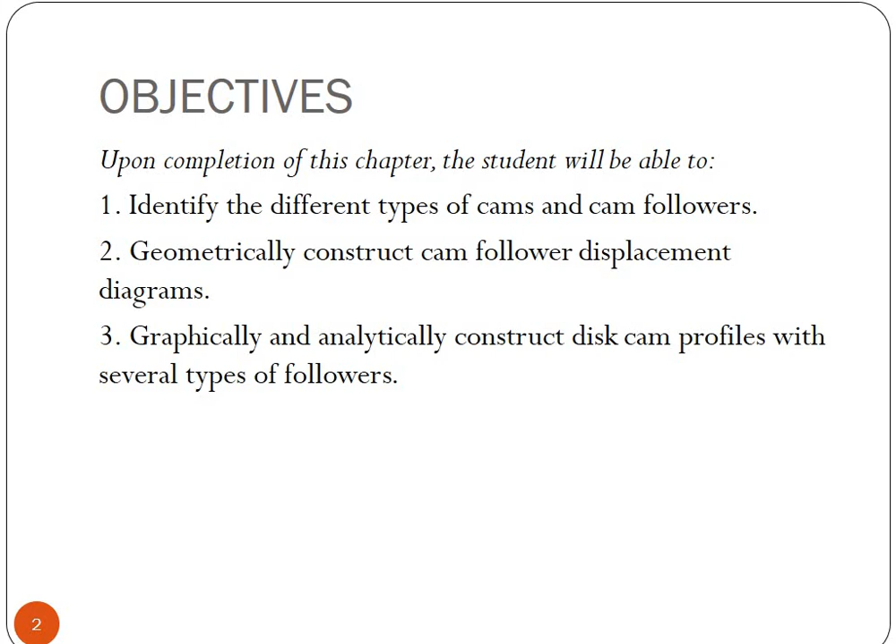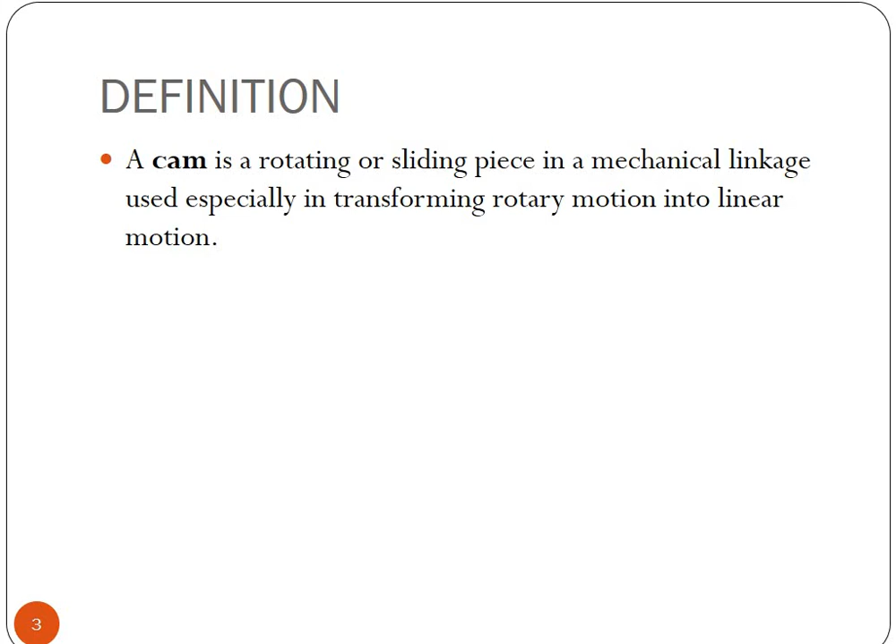So we will draw or construct the cam profiles. A cam is a rotating or sliding piece in a mechanical linkage used especially in transforming rotary motion into linear motion.

Types of cams: plate or disc cams are the simplest and most common type. This type of cam is formed on a disc or plate, meaning it is thin, as we can see in the figure.

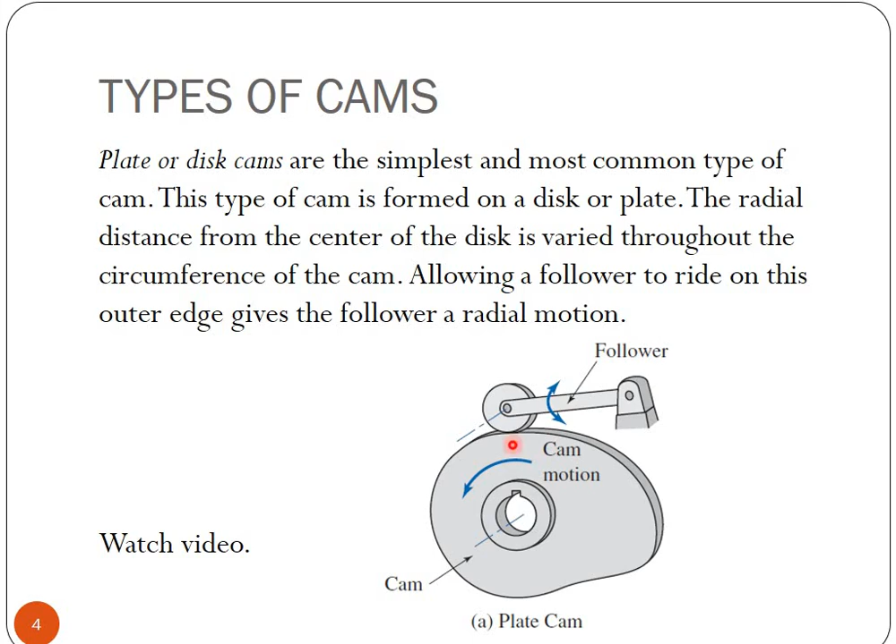The radial distance from the center of the disc is varied throughout the circumference of the cam. If we notice, the radial distance from the center to the surface varies, so the radius differs at different points. Allowing a follower to ride on this outer edge gives the follower radial motion.

Cylindrical or drum cam: this type of cam is formed on a cylinder. A groove is cut into the cylinder with varying location along the axis of rotation. This is the axis of rotation.

Attaching a follower that rides into the groove gives the follower motion along the axis of rotation, so the motion of the follower is left and right. Or if we flip it upright, it becomes up and down.

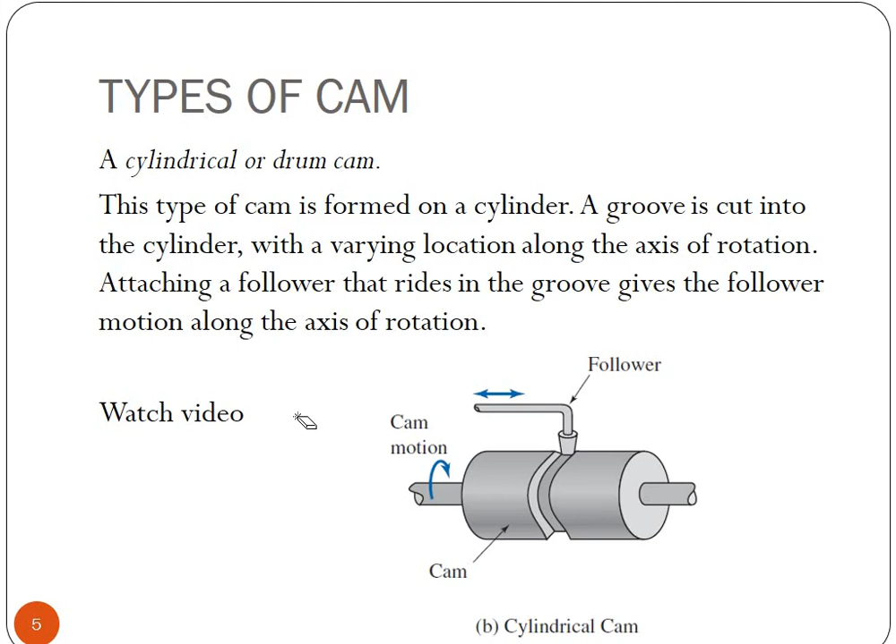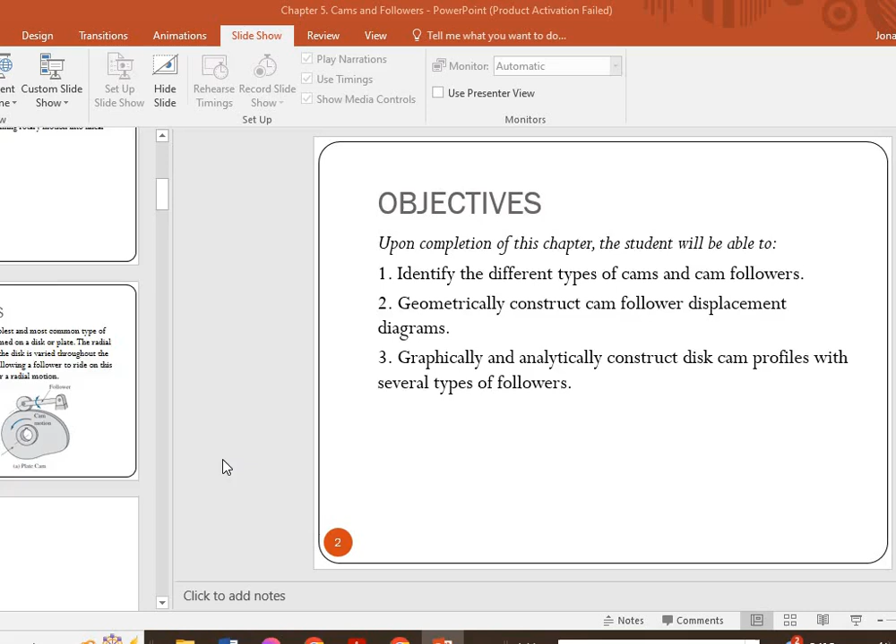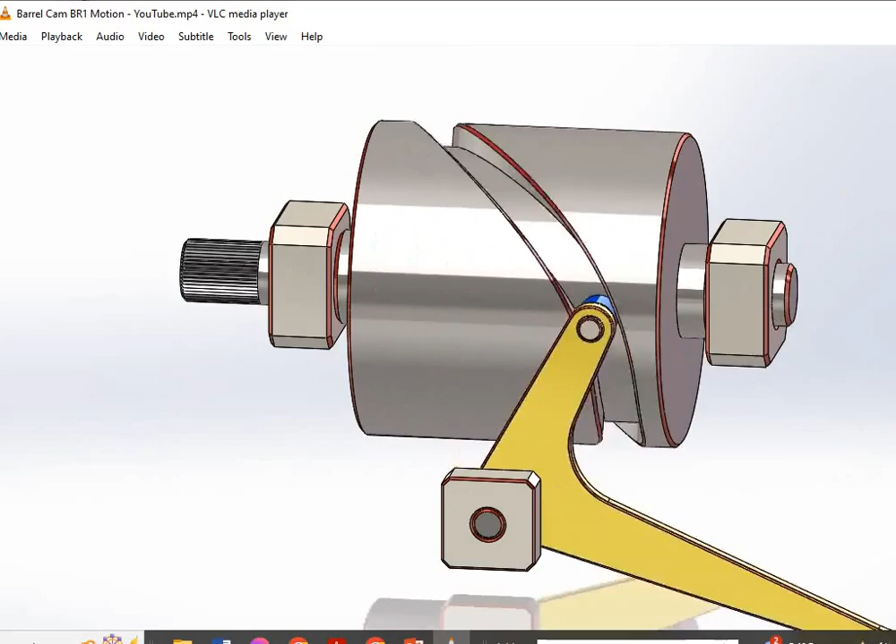Let us watch the video. This is the barrel cam type, which is used in a sewing machine.

Next we have the cam with translating motion. When we say translating, it means the follower moves only in a straight line.

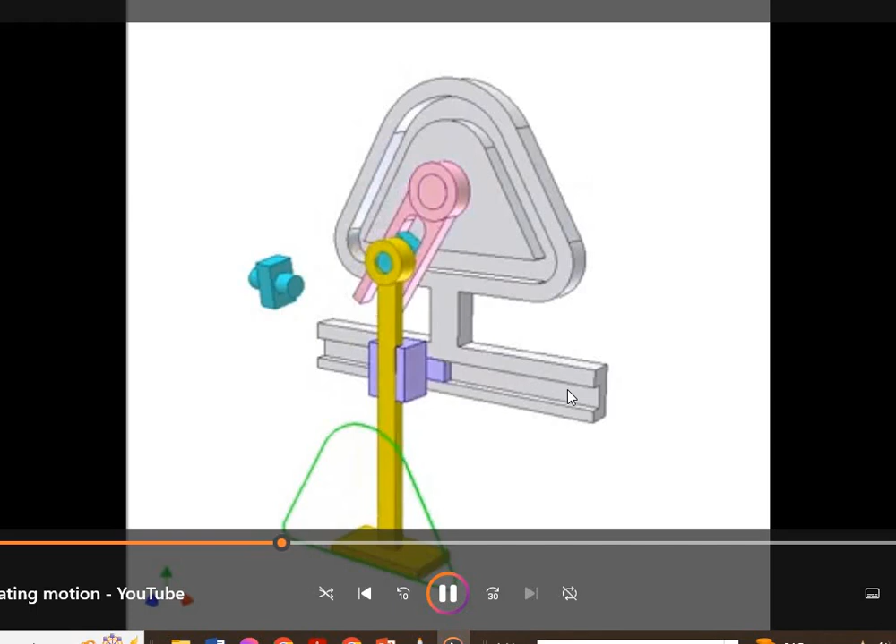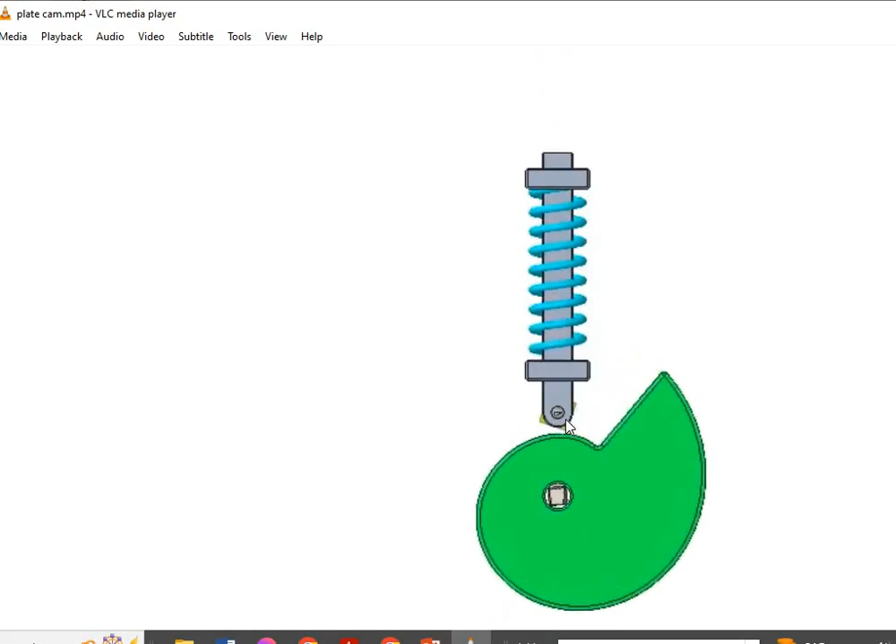Then the plate cam works like this. This is our follower, a roller follower, which has a wheel-like part, and then we have a spring.

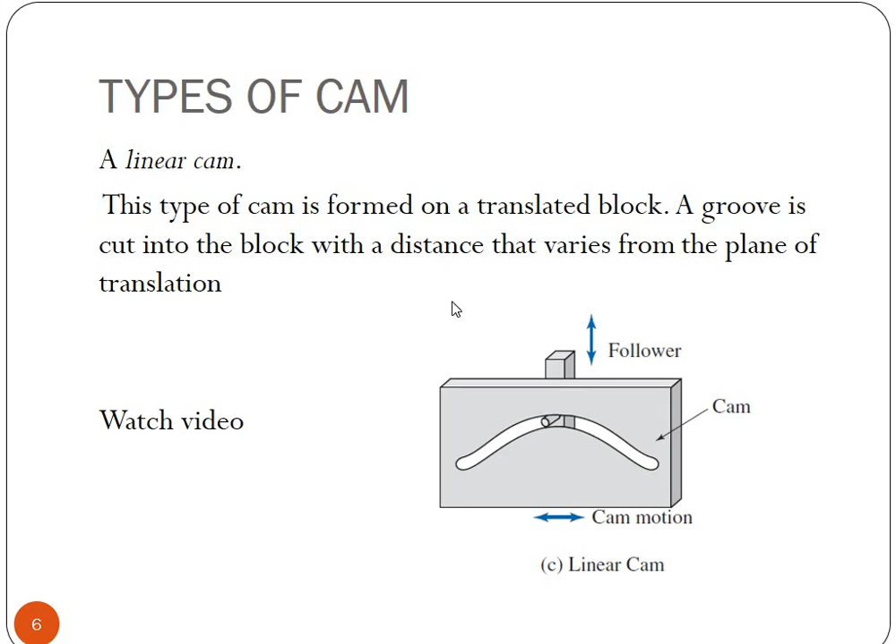Types of follower according to motion: translating, meaning it moves in a straight line. Its motion is only along this axis.

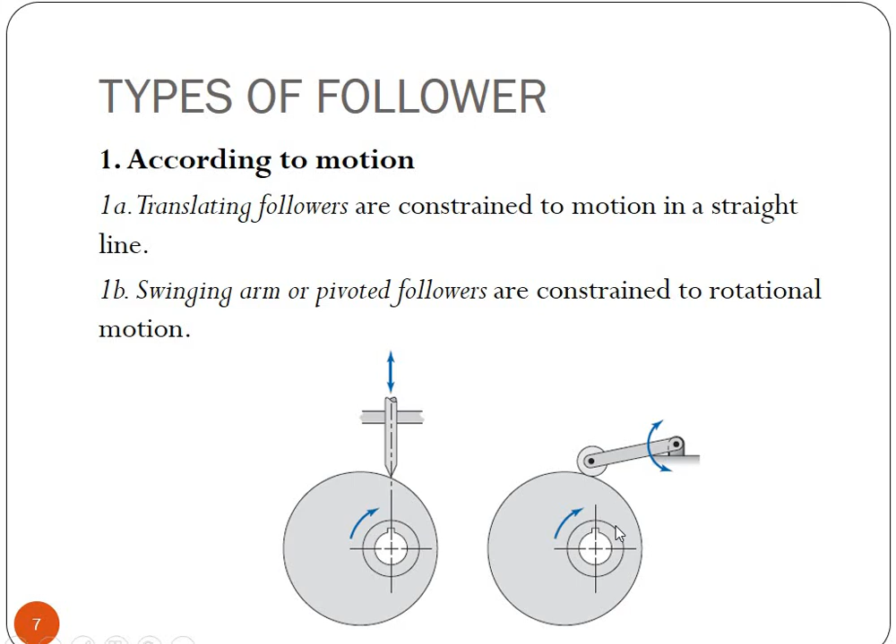According to position: inline. Actually the figure is flipped; the inline type should be at the top. This is our inline follower. When we say inline, the axis of the follower is inline with the center of rotation.

When it is offset, you have a certain distance with respect to the center of rotation of the cam. This is the center of rotation, and this is the axis of the follower, which has a certain distance from it.

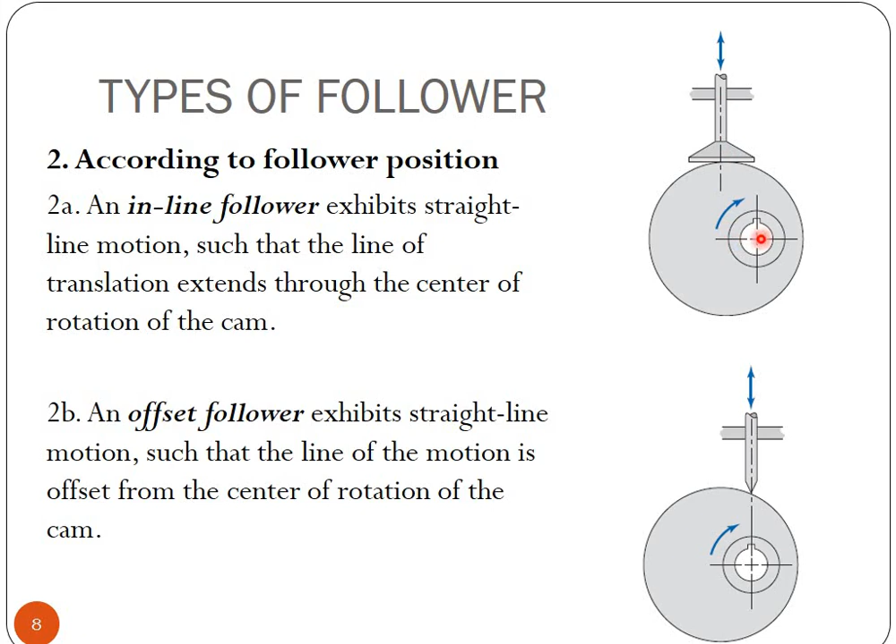The disadvantage of this type is high contact stresses and it wears rapidly, because the contact surface or contact area is small. Since the formula for stress is force over area, the smaller the area, the greater the stress.

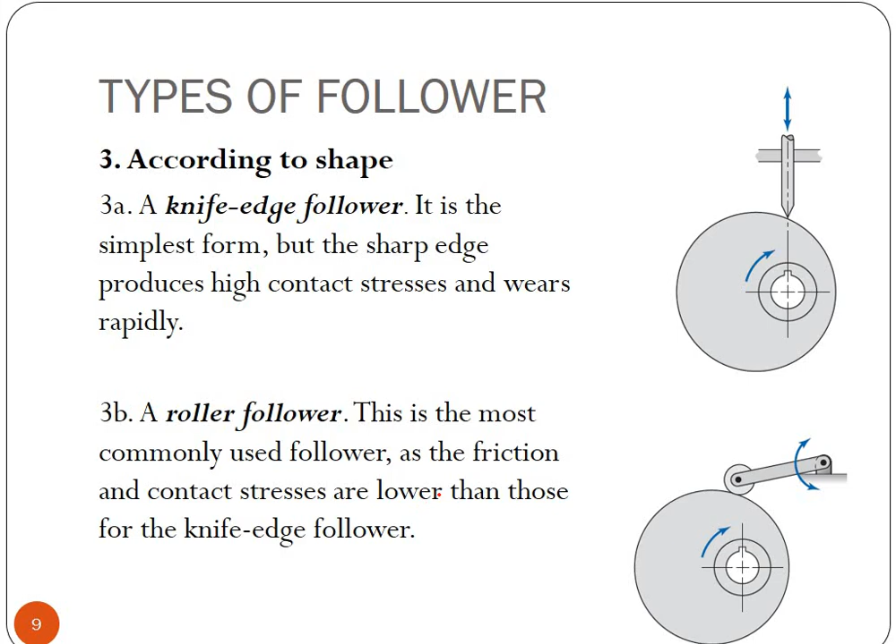Okay, next would be a roller follower. So ayan, kitang-kita naman na roller yung follower natin. Ang advantage nito, yung contact stresses is lower kaysa sa knife edge.

Flat face. Kapag sinabi natin flat face, ito yung bottom, ito nung follower natin is flat. This type of cam can be used with a steep cam motion and does not jam.

Kapag sinabi nating steep cam, paano ba natin explain yung steep? Sa atin, kung halimbawa pupunta tayo dun sa mag-climbing, yung tawag dyan, parang ito sana yung bundok. Masyadong hindi ko alam kung paano ba itatagalog to. Matirik, tama. Then if we compare with another bundok, for example ito, so ito mas steeper compare natin dito.

Okay, sa mga cam na steep, kagaya ng pinakita natin kanina, saan na ba yun, yung video natin, yung sa plate cam.

Consequently, this type of follower is used when quick motions are required. Isang advantage pa pala nito is does not jam. Ang ibig sabihin ng does not jam, kapag matirik, okay, yung aakyatin ng cam dito, hindi siya basta-basta titigil.

Then, ang follower natin, for example, ay roller follower. Ito yung roller follower natin. Then, nandito yung inyong guide. So, kung papaikutin natin to, there will be a time na parang

mahihirapang umakyat ito, yung roller follower. At the same time, parang siya. For example, lalagay natin dito yung follower natin. So kung mapapansin, kung papaikutin natin ito, yung follower na yung cam natin ng paganyan, parang mapuputol to, mabibend dito sa banda. Yan, okay. So kung ganun yung mangyayari, mag-ano siya.

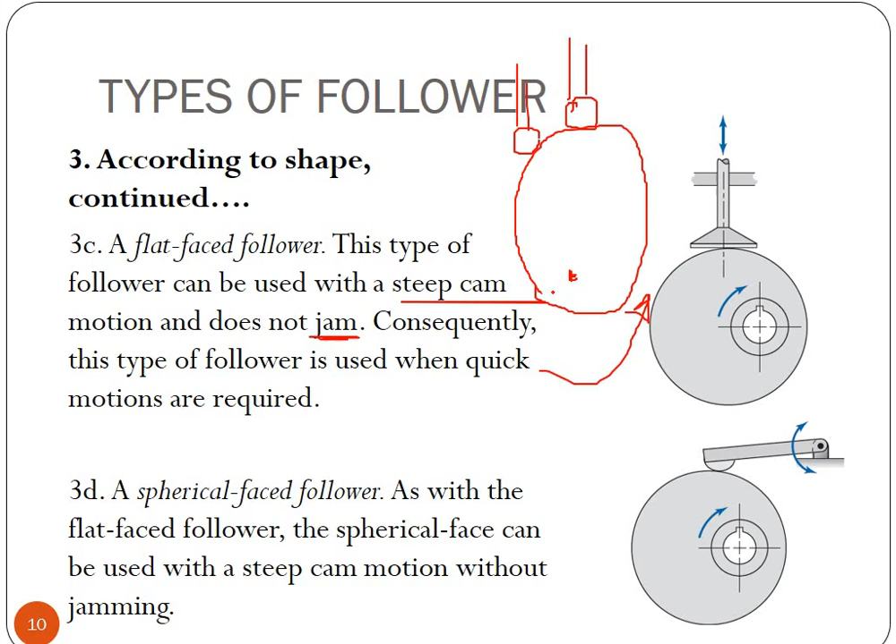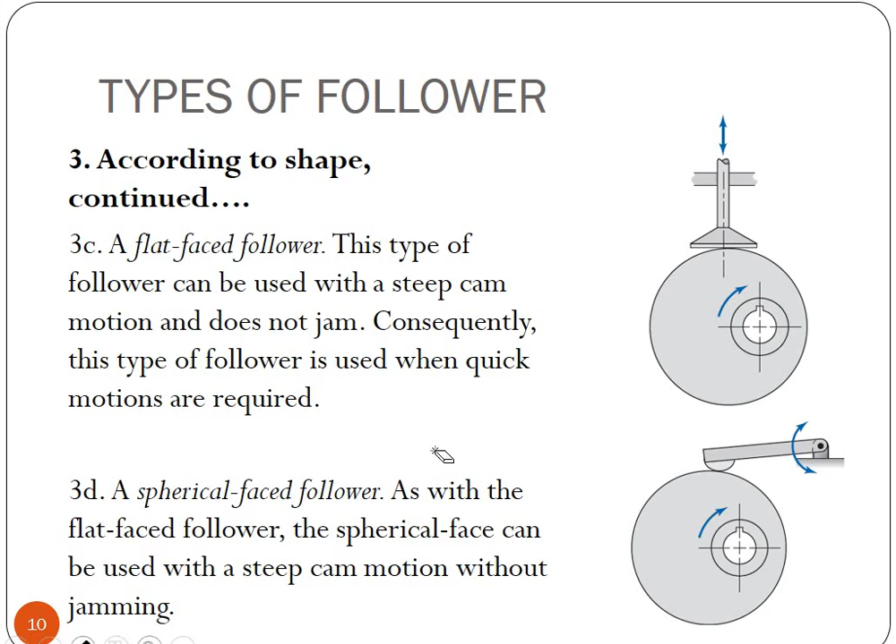Magkakaroon ng jam, titigil. Mahihirapan yung cam natin na umikot. So yan. And then, so yun yung mga advantage na meron si flat face, spherical. Okay, we know naman yung ano ibig sabihin ng spherical. Ito, yung advantage niya can be used with steep cam motion without jamming.

Ayan, for example, assuming na yung cam natin ay ito mismo, sabihin na lang natin na ano na to kanina, block, yung block type na follower. Okay, so assuming naman dito yung ating follower. Then yung motion naman ng cam natin, assuming na yung profile nito, yung diagram na ito mismo yung cam natin. Then ang motion ng cam natin is left to right.

So kung halimbawa i-move natin pa right itong block na ito, yan. So mangyayari, yung follower natin tataas. Yan, tataas. So kung babalik rin natin para mas madali siyang i-analyze, i-reverse natin. Instead na ito yung cam yung mag-move, yung follower natin yung move natin.

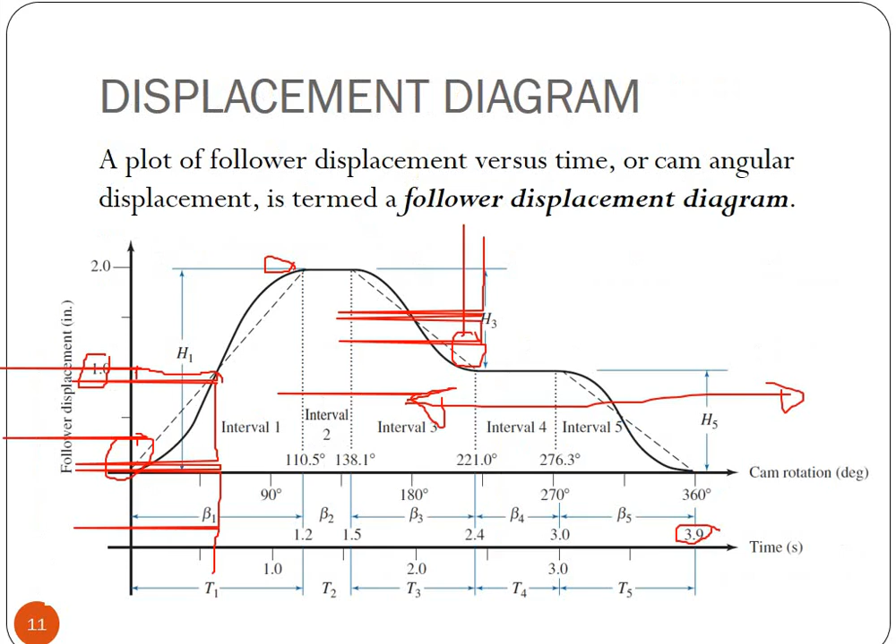So yung displacement ng follower mo ay nasa 1 inch na. Then after ng 1.2 seconds, ito nasa tuktok na siya. So ganyan yung displacement diagram. Anyway, sa mga susunod na natin na lectures, tuturuan ko kayo kung paano mag-draw ng displacement diagram.

Okay, follower motion schemes, so mamaya na lang to. Let's continue sa susunod na lecture.